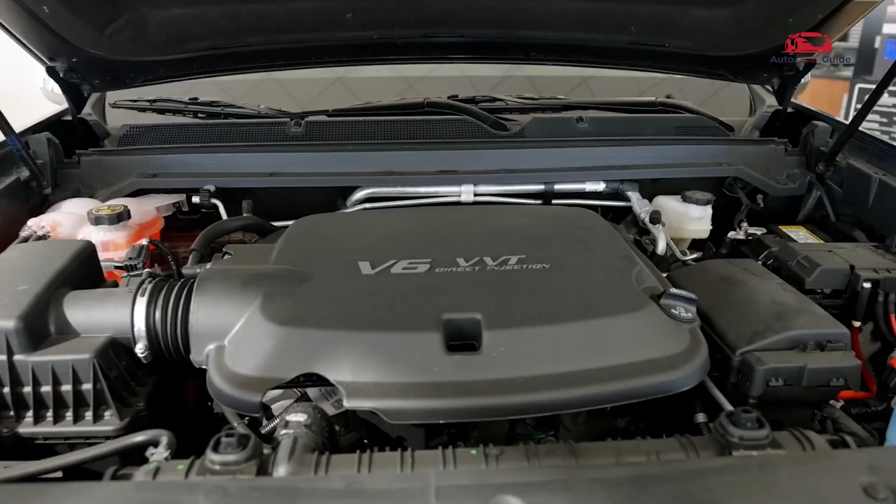Wondering about the fuse box diagram and location for the 2022 GMC Canyon? The fuse box is essential for managing your vehicle's electrical systems, with locations in the engine compartment and cabin, making it easy to identify and replace fuses when needed.

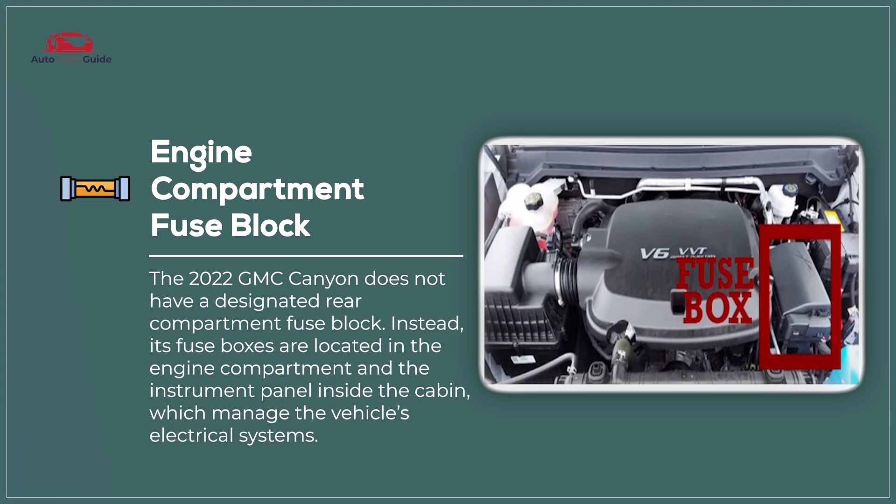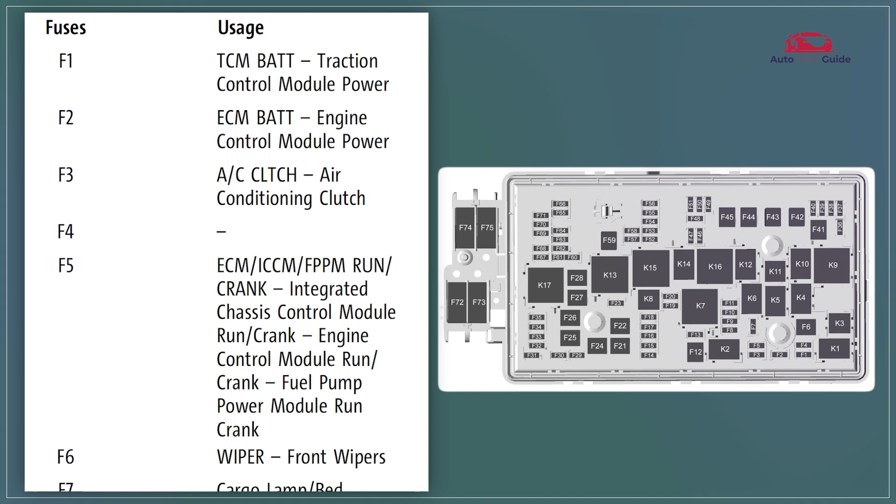Engine compartment fuse block. The 2022 GMC Canyon does not include a dedicated rear compartment fuse block. Its electrical systems are managed through the fuse blocks located in the engine compartment and the instrument panel, ensuring efficient control of key vehicle functions.

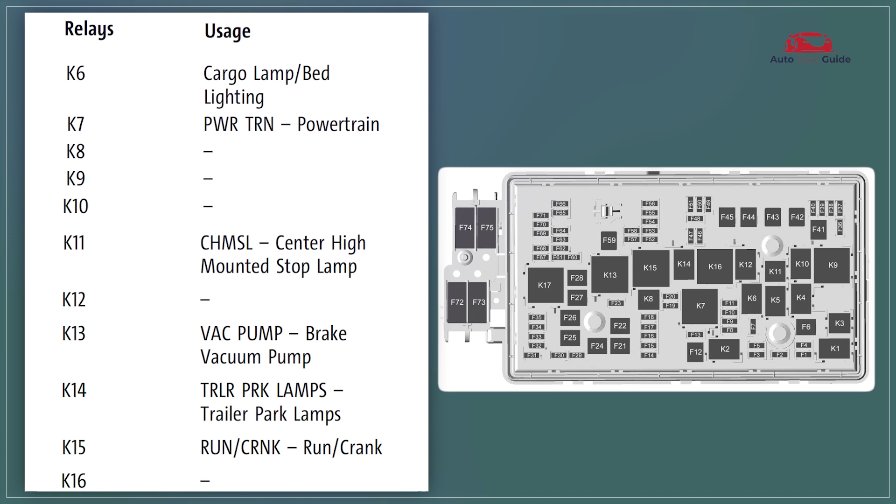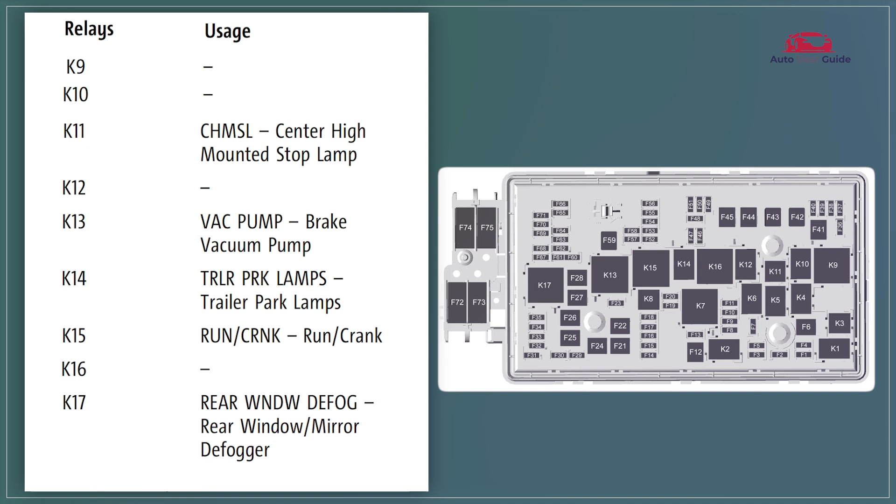Instrument panel fuse block. The instrument panel fuse block in the 2022 GMC Canyon features a compact and organized design with clearly labeled fuses for interior electrical components like the infotainment system, power windows, and interior lighting. It allows for easy access and maintenance.

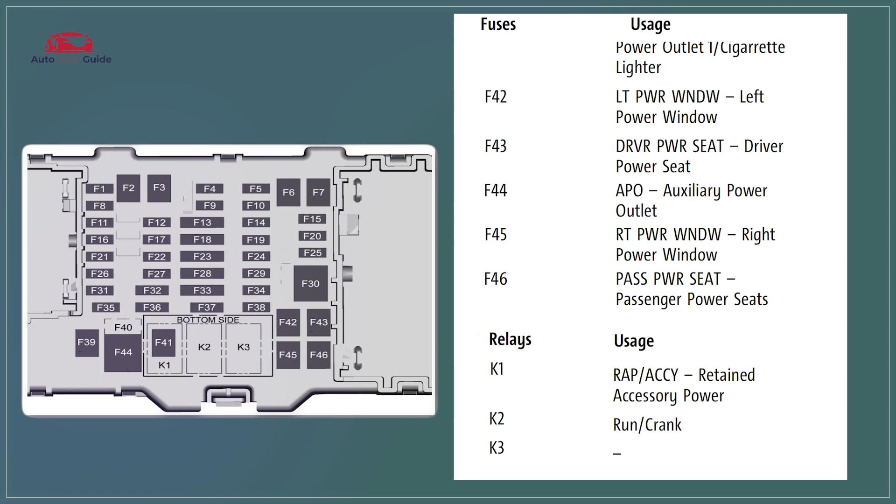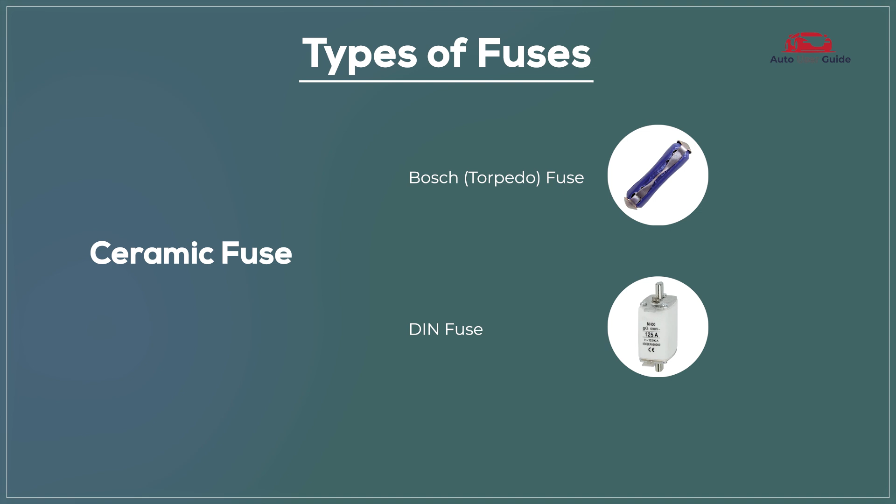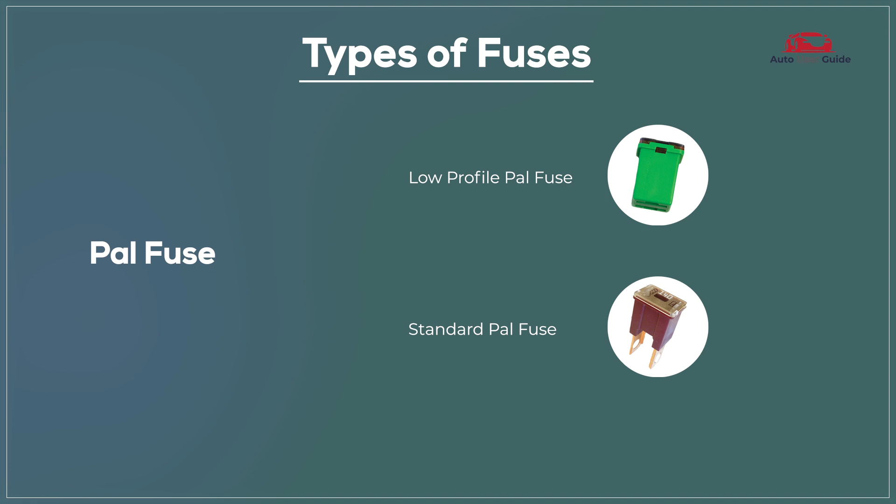Types of fuses: blade fuse, standard blade fuse, mini blade fuse, maxi blade fuse, micro 2 fuse, micro 3 fuse, J-case fuse. Glass tube fuse, AGC fuse, SFE fuse. Ceramic fuse, Bosch fuse, DIN fuse. PAL fuse, low profile fuse, standard PAL fuse. Link fuse, mega fuse, high amperage link fuse.

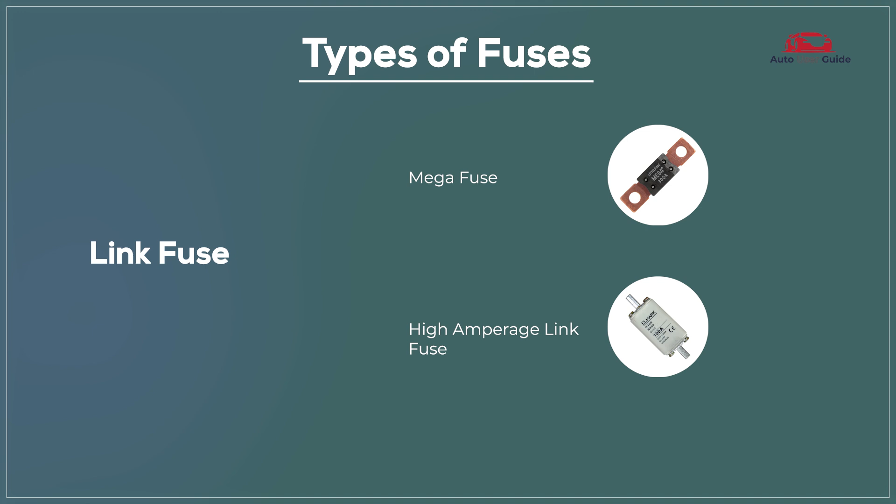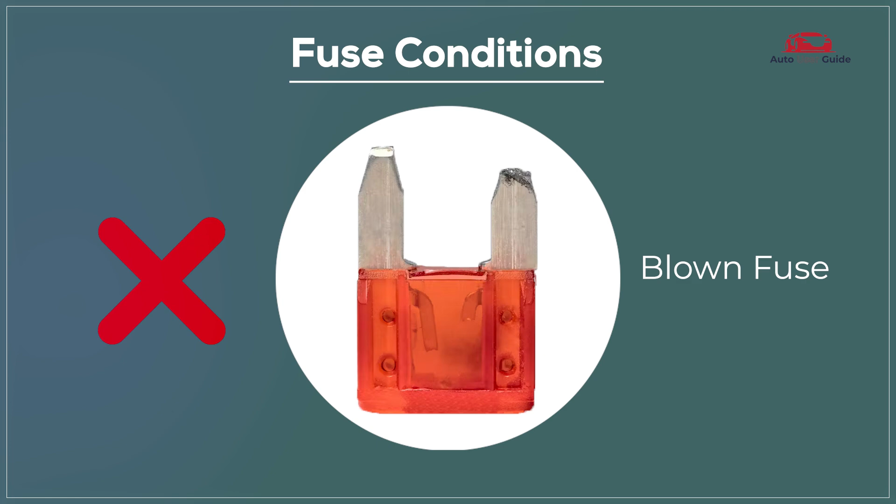Fuse conditions: blown fuse. A blown fuse means it's no longer functioning and needs replacement, while a perfect fuse is in good working condition and performing as expected.

How to change fuses: turn off the vehicle, locate the fuse box, identify the faulty fuse, remove the faulty fuse, inspect and obtain a replacement, install the new fuse, test the replacement.

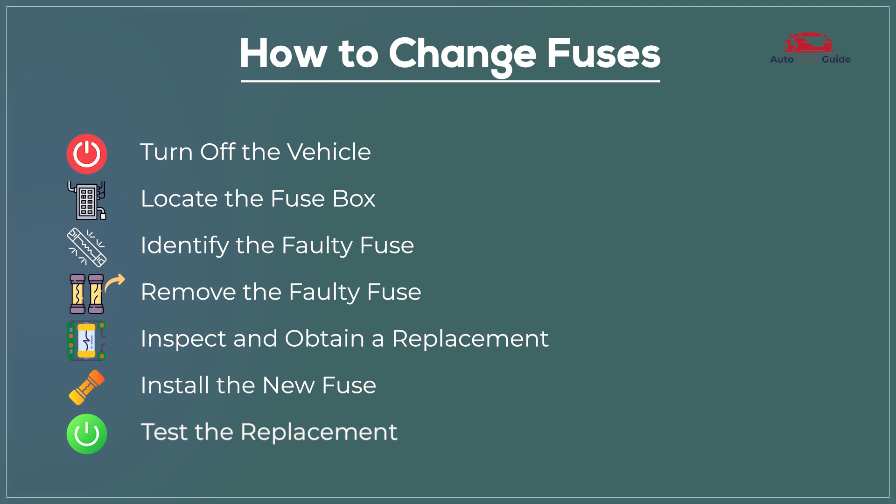Safety precautions: disconnect the battery, wear protective gear, use proper tools, check for correct amperage, avoid water exposure.